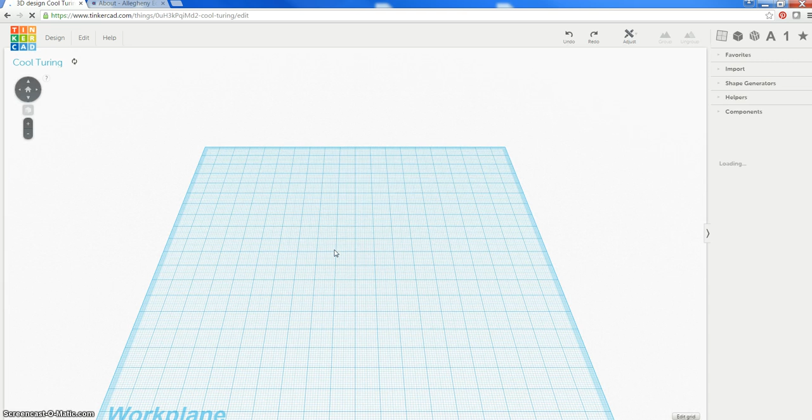First thing we want to do is edit the grid. I'd rather work in inches, so I'm going to switch that. I clicked on Edit Grid down here in the right hand corner. I want to make my width 2.5 inches and my height 5 inches.

We're going to make this kind of a simple hall pass. So over here on the right hand side, you have some different shapes, letters, numbers, things like that.

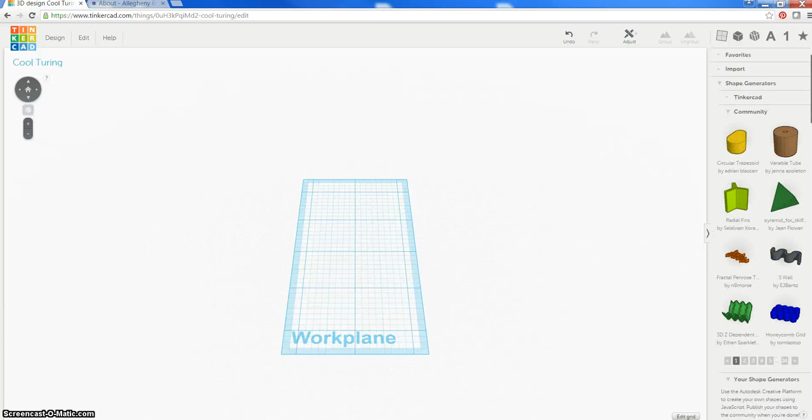You can even download stuff from the community, things and even tools that allow you to make different parts or variations on different parts. But even just, you can build quite a bit from just the simple tools.

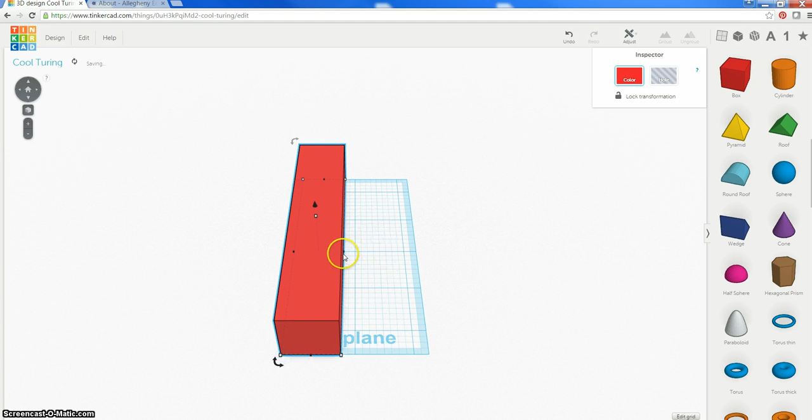So we're just going to grab a box, click on a box, and drag it over here. Alright, I'm going to put it there, and I'm simply going to use these dots on either side of the box in order to build the thing.

Right. And you basically push or pull these things.

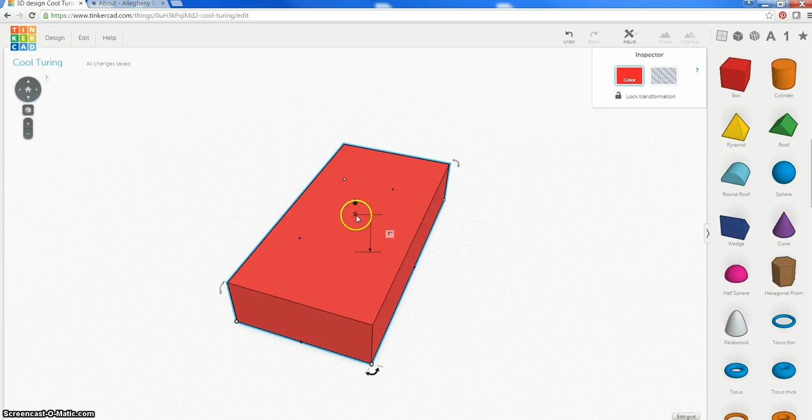The arrow is going to allow me to move the part, and currently my grid is set to snap to just off screen 1/8 of an inch. So I can drag this down. I can make this as thick as I want. I'm going to make a platform that's about 1/4 of an inch.

Okay, and let's just say I want to cut a hole through it. So I'm going to take the cylinder and pull that over somewhere about there, and then I want to make that...

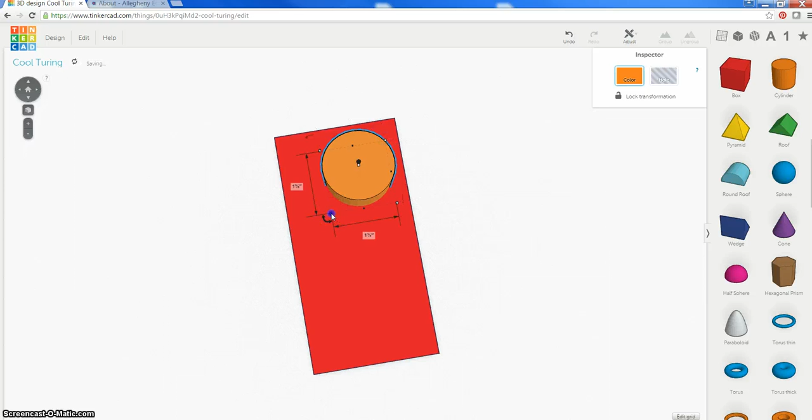Make that 1 7/8 that way, and 1 7/8 that way. There we go.

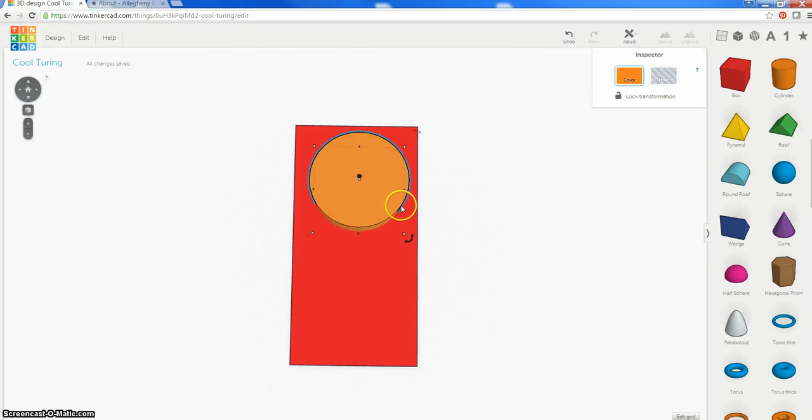Make it 1 3/4 instead. Okay, alright, so I want to cut through this all the way, so I can grab this cylinder...

I can drag it down, and basically I can just group the two objects. So I'll grab the cylinder, and then hold the Shift key, grab the block.

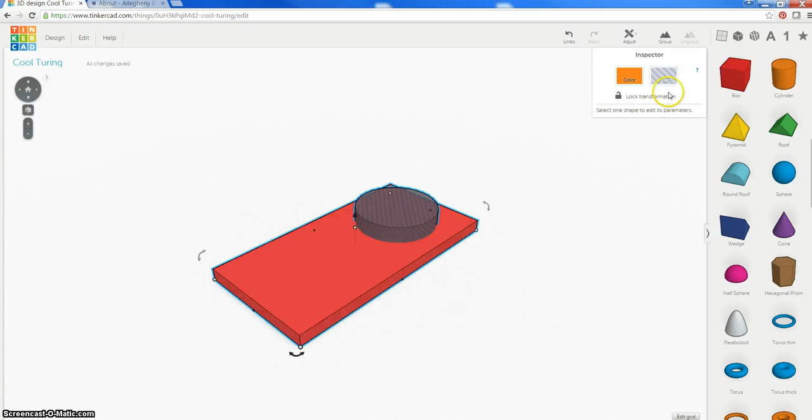Oh, I'm sorry, I forgot one thing. Make the cylinder a hole, then grab the block also, and hit group. And that cuts a hole through it.

Okay. If I want to add a little something like lettering, I can do that. So I'll come down here and grab the letter P.

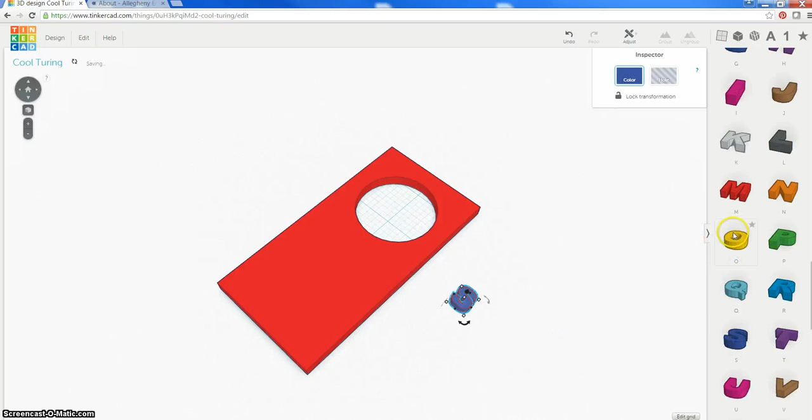We'll need an S, and we'll need an A. Where did the P go?

And I'm just using the mouse wheel. If I hold the mouse wheel, that pans. If I hold my right mouse button, that rotates.

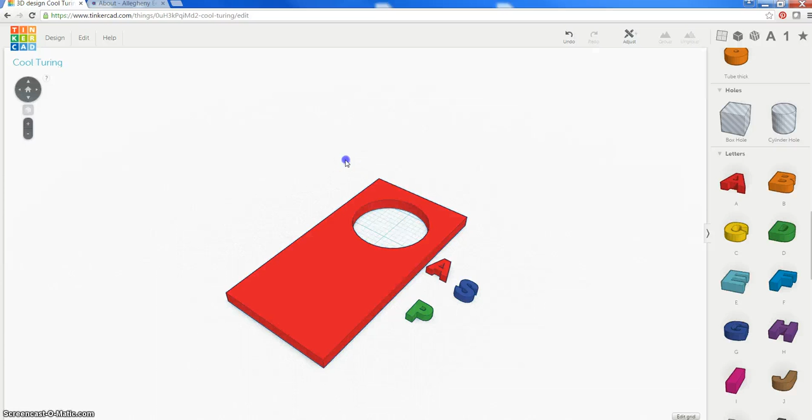Okay, and of course left click will allow me to select.

So I'm going to grab P. Oops. Let's bring it up a little higher. There we go. And bring it over here, and I want to rotate it.

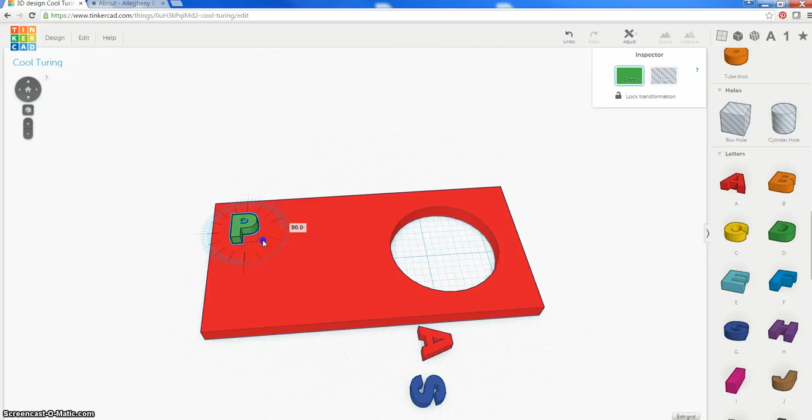So see, I have these convenient little corner arrows. I can simply grab this and rotate it about a number of degrees, and that's going to snap there for me.

And I'm going to do the same thing again. Rotate, and rotate. There we go. Bring that up a little higher.

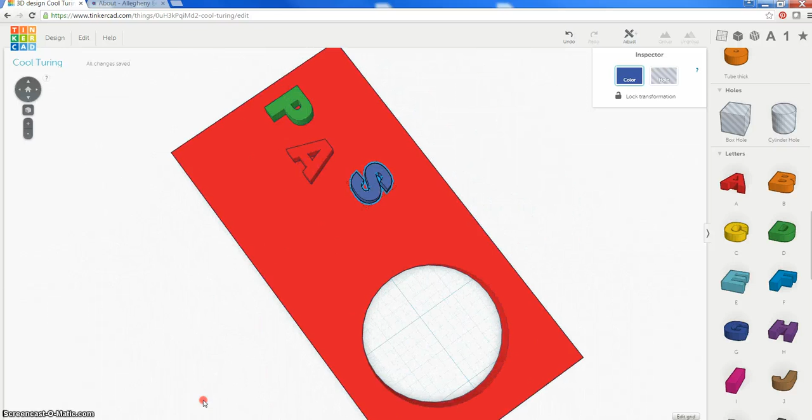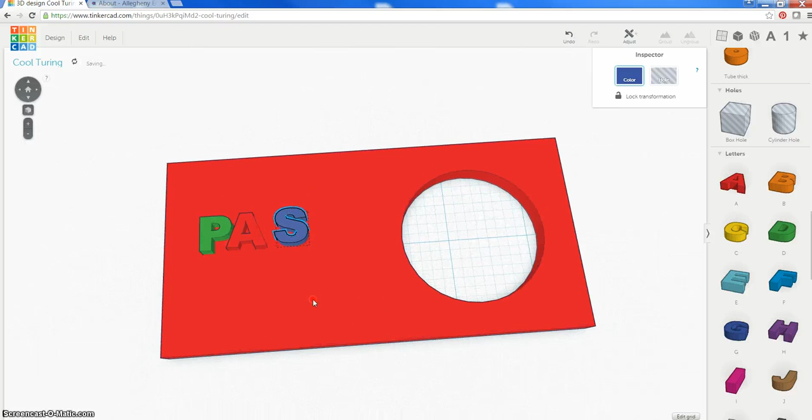Okay, line these up a little bit, and for a hall pass I don't need this, so I'm going to just drag that down, do the same thing there, do the same thing here. Okay, so I'm just moving those around how I want them.

And I'm just going to make a copy of this one, so I'll say Control-C and Control-V to copy and paste, and just move another one over.

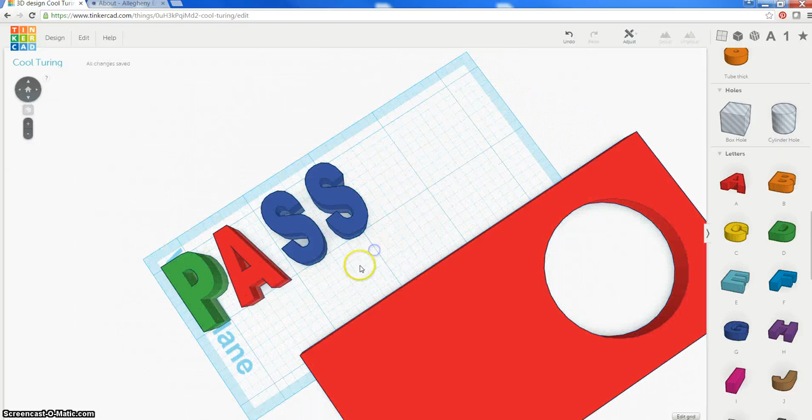And just moved them around. I can select all of them, and I can grab one of the corners in order to fit and scale these. Okay, I'll just move this out of the way so that I can see my grid. So I can move it back now that I have those lined up the way I wanted them to.

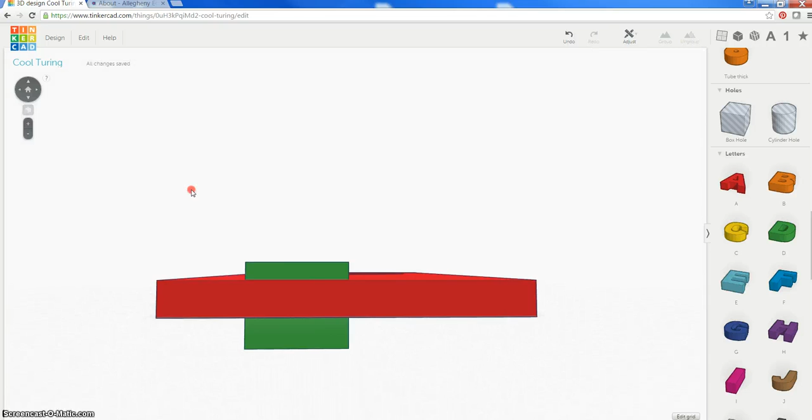Alright, so they're cutting all the way through. I don't want it to cut all the way through. I can just grab all of them. Now what we could do is either leave them raised like this and 3D print them that way.

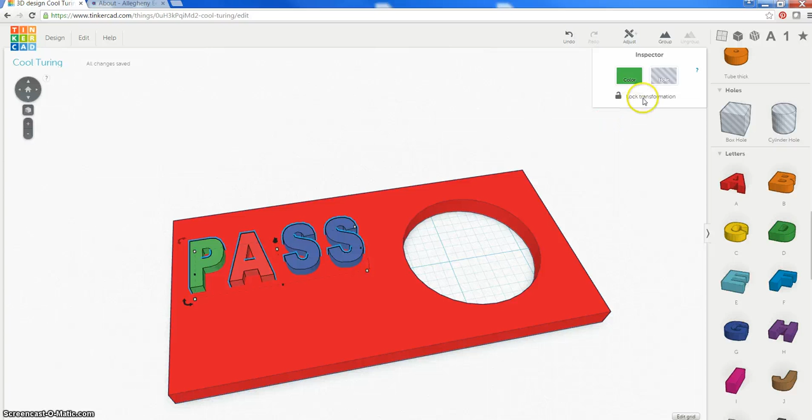Or we want it to just be sunk into the material a little bit. So again, with all of them selected, we'll make those holes, select the back piece, say group, and that will cut into those.

Now maybe we didn't want to do that, or we wanted to use these and have them raised on this side, so we could say undo.

We could make a copy, paste these, move it around to where we want.

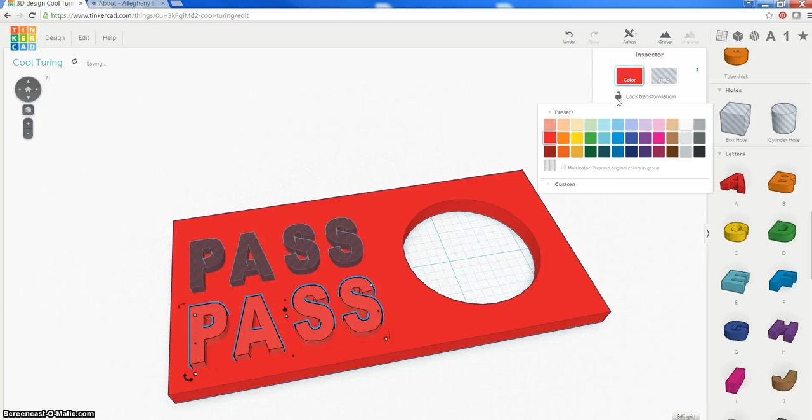Now we could give it a color. Maybe line it up a little more. Select all these, holding the shift button again.

Okay, so that one side, these are going to be cut through. I'm going to hold that, shift, hold the whole back, select the whole back, say group, cut in, and now raised as well.

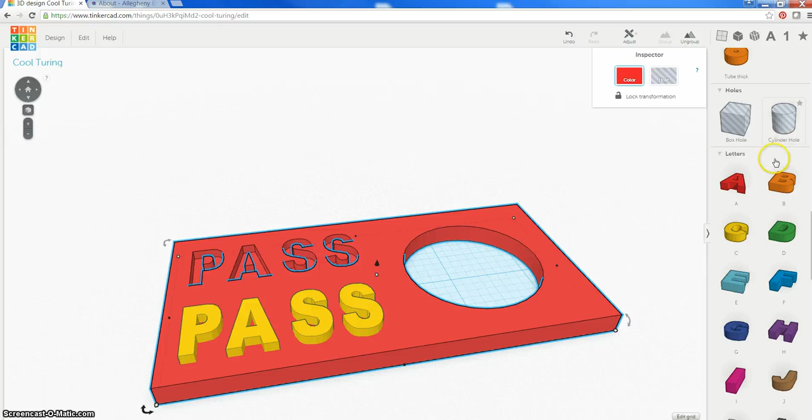Okay, you can play with all sorts of letters and numbers here, as well as other shapes, in order to make further designs or add more detail to this.

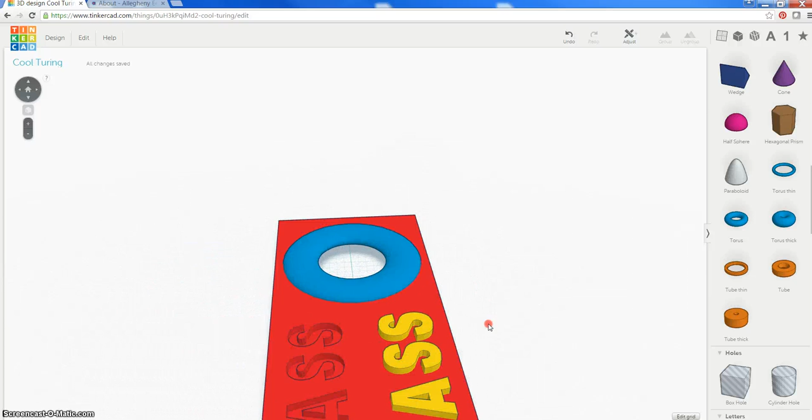Give that a bit of an edge. You can add pieces as you like. You can extend pieces lower if we look at the bottom.

I can do that. Okay, now it has this kind of grommet through it, pretty simply by adding and either adding or subtracting pieces from this.